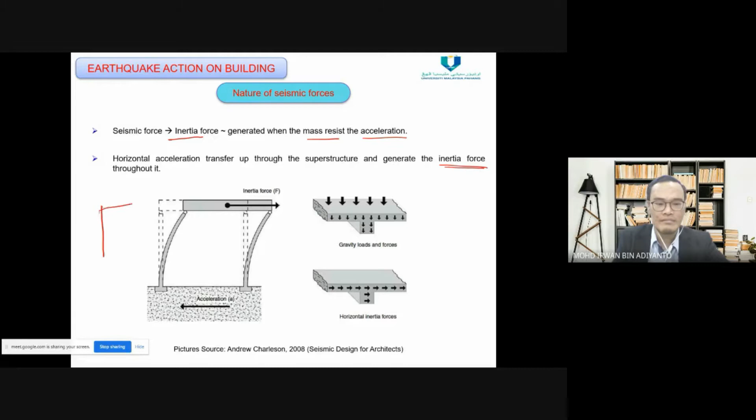Let's say this one: actually the building is static originally, and then when the earthquake strikes the site, it will cause ground movement. We can measure this in the form of accelerations, velocity, and displacement. It will accelerate the ground, and then this part of the building will remain static, which generates inertia.

This is the comparison between gravity forces and inertial forces: gravity load acts vertically, while inertial forces act horizontally.

For simplicity, to simplify your understanding, the inertial forces are assumed to act at the center of mass at each floor. This is the distributed inertial forces in the floor, columns, and walls.

The forces come from the masses of the building, which is from the dead load of the structural elements and also the imposed load—I mean the partial imposed load. We do not consider the whole imposed load; what we consider is about 24 to 30% only during the earthquake. It is distributed throughout the building from the masses, from the weight of the elements, and then we assume it becomes masses on the whole story.

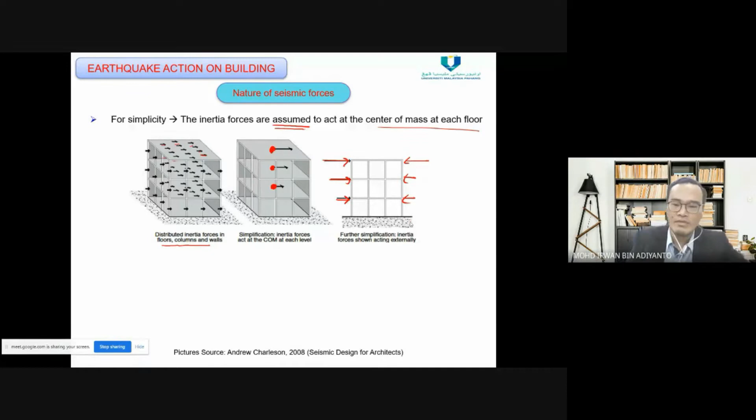Because, if you still remember our physics knowledge, force equals mass times acceleration (F = MA). This is the force, the mass is the weight of the building plus the imposed load, and the acceleration is from the time history record, where we record the accelerations against time during the earthquake.

So this is the comparison between wind action and earthquake action. Wind action is when the wind blows on the building, it acts as a pressure on the external cladding or external brick wall, and then we distribute the load to the joints. But earthquake load originates from the inertial forces and is strongly influenced by the amount of mass and the amount of acceleration.

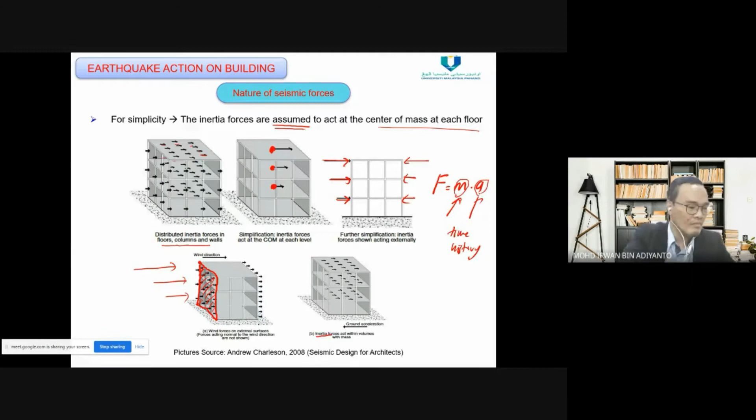Here are some factors affecting the severity of forces, which is the weight. As mentioned before, according to Newton's law, force is proportional to mass: F equals ma. So we try to be as lightweight as practicable. For example, we replace heavy masonry interior walls with lighter material in order to reduce the mass, and at the same time reduce the forces.

The natural period also affects the severity of forces, as well as the damping, response spectrum, and the level of ductility.

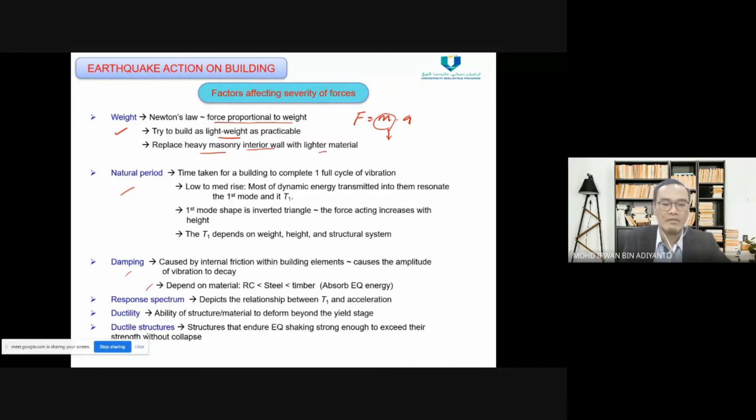Now we take a look at structural damage due to earthquake. This is typical damage due to earthquake on buildings. It can be divided into two: damage on the structural system and damage on the non-structural system. For RC buildings with moment resisting frame systems, damage is observed on the beam, column, and the beam-column joint. For the non-structural system, damage usually occurs on the brick wall and partitions, as well as the ceiling, where the ceiling will fall down.

This research from Bayraktar et al. mentions that structural damages occurring on RC buildings as a result of earthquake actions are mostly associated with the following reasons, among the main reasons of structural damage: soft story failure, weak column strong beam design, short column effects, and lack of transverse reinforcement in the beam and column.

Let's say this is the joint of the beam and column. Transverse reinforcement means your link. Let's say this is your vertical bar of the column, and this is your horizontal bar of the beam.

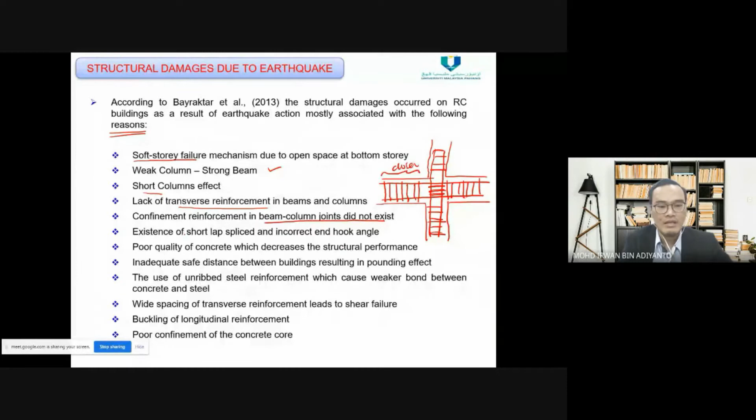And then there's the existence of short lap splices and incorrect end hook angles. Especially in links - imagine this is your link and this is the main bar. The end hook angle should be like this one, but sometimes in construction, to simplify, they just end up like this one. Let's say this is a column, so this one is weaker than this one.

Poor quality of concrete, inadequate safe distance between buildings which results in pounding effect, and also the use of unribbed steel reinforcement, which causes weaker bond between concrete and steel.

So for seismic design, we prefer the use of steel bar with ribs, not rounded bar. And then the wide spacing of transverse reinforcement led to shear failure, buckling of longitudinal reinforcement, and poor confinement to the concrete core. That's the main reasons for structural damage to RC buildings.

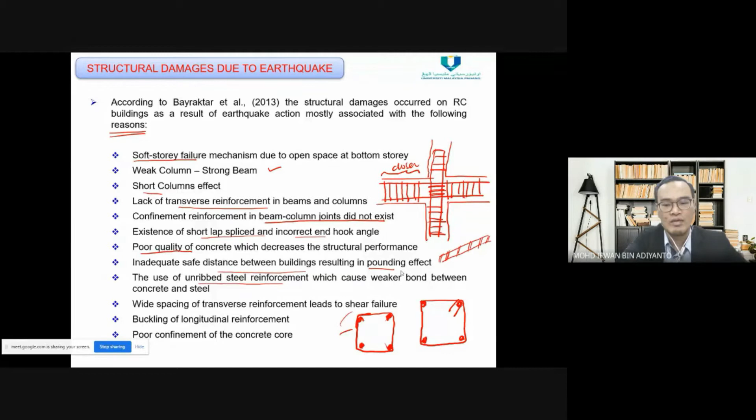Now we take a look at the performance level.

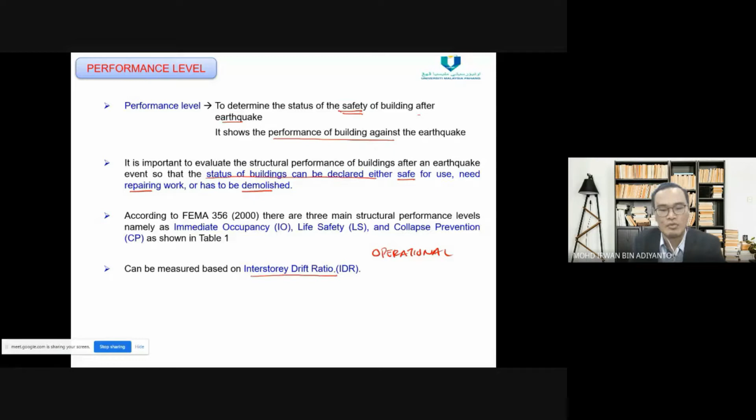And in terms of inter-story drift ratio...

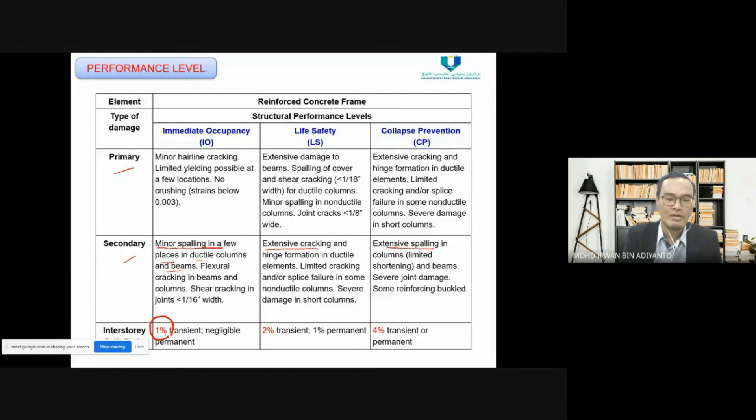Okay, can we continue? Sorry for the interruptions. Okay, for the immediate occupancy performance level, the inter-story drift ratio will achieve 1% of drift, and then 2% for life safety, and 4% of drift for collapse prevention.

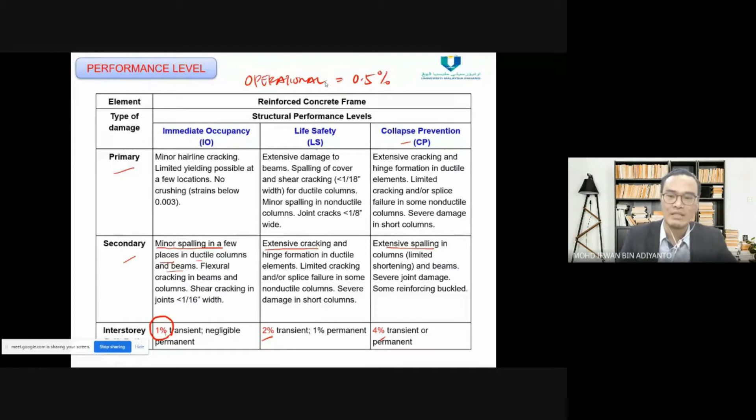For operational, okay, the drift is equal to 0.5%, where the building can operate immediately after the earthquake. We can use the building immediately without further checking, but it must achieve at least not more than 0.5% of drift.

Okay, here is the performance level. The inter-story drift ratio is the relative displacement of adjacent story normalized to its story height.

Let's say this is story number 1, story number 2, and story number 3. So the inter-story drift ratio for level number 1 is the displacement here, let's say this is point number 1, this is point number 0. The lateral displacement here minus the displacement at the bottom, divided by its corresponding story height, and multiplied by 100. So we will get the value of inter-story drift ratio.

Okay, this is an example of a 3-story RC model. I compare the performance between soil type B and another soil type, for level number 1, level number 2, level number 3. You can observe here that the maximum inter-story drift ratio occurred at the bottom part of the building, where it reached 0.75% for one soil type, and it performed better on soil type B, where the value is only 0.5%.

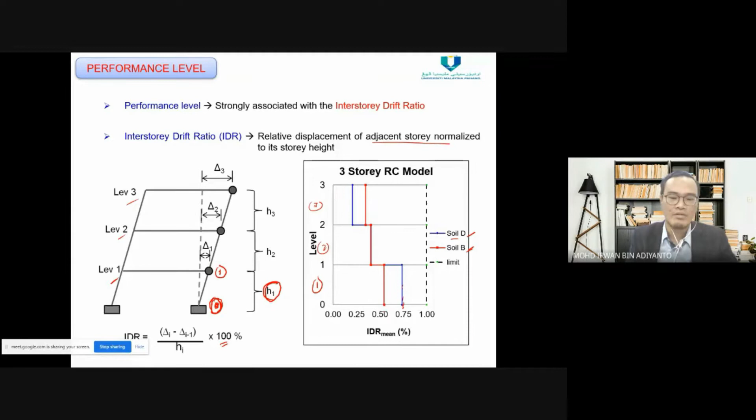Okay, let's do some exercise to avoid sleepiness. Let's say we have a 3-story building where the story height H1, H2, and H3 is 3.3 meters, and the lateral displacement is given here as 0.132, 0.208, and 0.314.

How to calculate? First of all, in my subject, I advise my students to do it in the form of a table like this one. We just write down the value of lateral displacement here, and then we measure the value of drift. Can a student help me fill in this form?

To fill in this form, what is the value here? Any students? 0.132, okay. We will start from the top first. 0.106, okay, how about this one, the second story? 0.076, okay, good. And then the last one, 0.132, okay good. So I hope you know how to calculate this value.

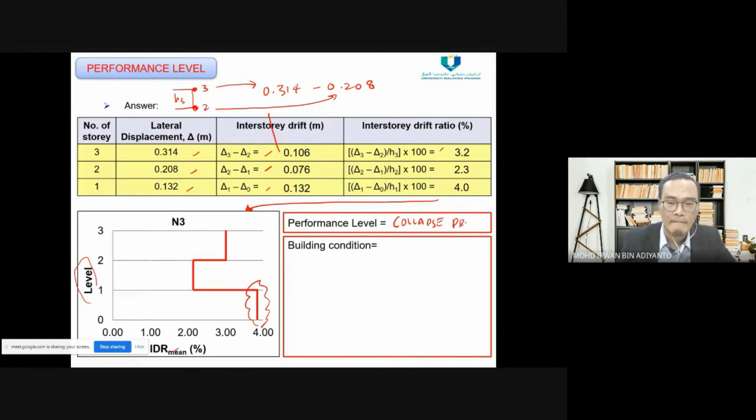Collapse prevention, or CP. Why do you choose collapse prevention? Because the highest IDR is equal to 4%. So at this level, what do you propose for this building?

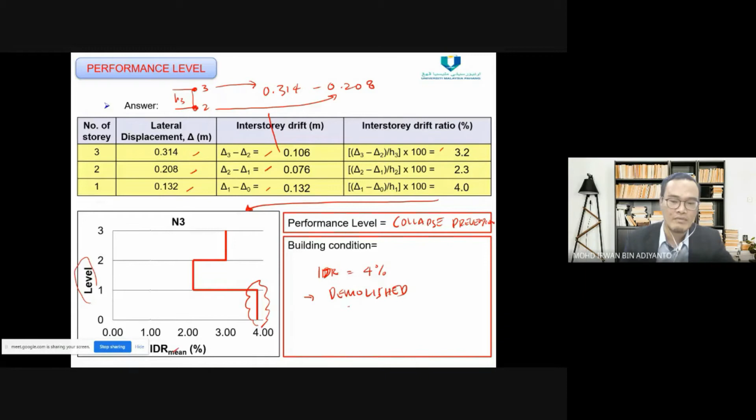Is it suitable to be used anymore? No. Okay, so you must propose for the building to be demolished because the repairing work will be very expensive, as the column almost loses its ability to cater for lateral load and even for gravity load. It's very difficult to repair, so it is recommended to demolish the building.

Okay, how about exercise number 2? I give you 5 minutes to settle. Do you have the answer? Anybody have an answer for this one?

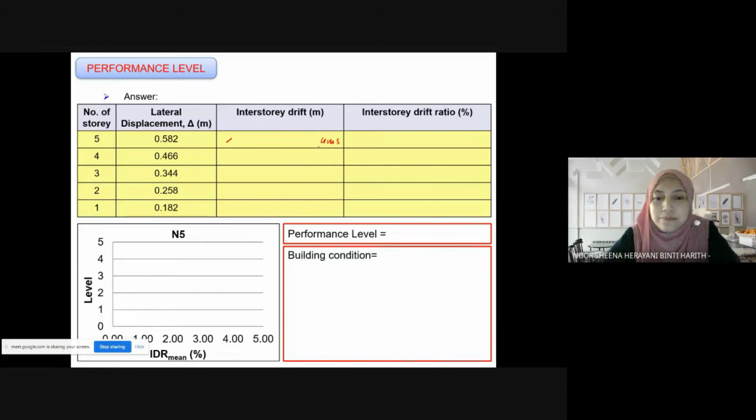Any volunteer from UMS to answer this one? Hello, my name is Anand, I'm from UMS. Okay, congratulations, what's the answer? My answer is 0.116. 0.116, okay, exactly, this one 0.116, okay, congratulations.

So how about Unimap, any volunteer? Iqmal, sila. Assalamualaikum, salam, okay, siapa nama? My name is Iqmal, I'm Iqmal Hakim. Okay, what's your answer? Answer is 0.122. Okay, congratulations.

Anybody from UMP? My answer is 0.086. Okay, congratulations. Anybody from ITB?

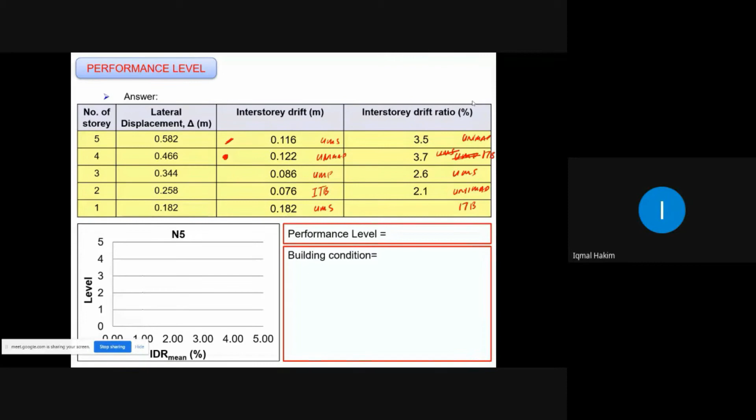Okay, Unimap. 2.1, sir. 2.1, okay, what's your name? Iqmal. Iqmal, okay good. Okay, and last one from ITB.

Okay, your answer please. Who's the first to answer this one, Andy or... okay, any answer here from ITB? Hello sir, okay hello, Andy again. Yeah, okay good, 4.55, 4.5.

Okay, 4.3 I got. Is it okay? Does everyone get 4.5? Oh sorry. 4.5 or I think 4.3? The height of the first story, 4 meters, is right? Sorry, first story is 4 meters.

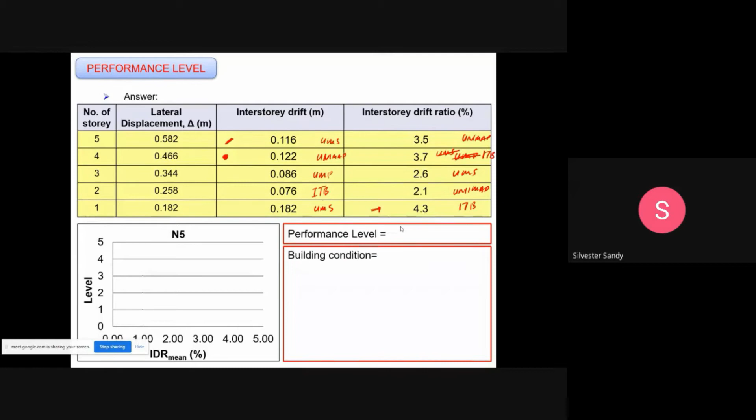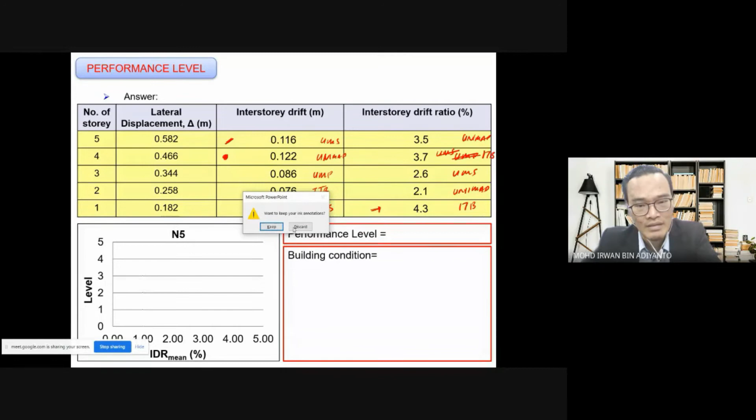Sorry, per type? The height of the first story is 4 meters. No, sorry, it's 4.2 meters. 4.2 meters, okay, I missed that. Okay, so thank you, it's 4.2 meters, it must be lesser. Okay, let's look here, 4.2 meters, okay, that's good.

Okay, so how about the interstory drift ratio? So the graph will be this one, okay, you just follow the value given by the table. And then, may I know what is the performance level here? Anybody?

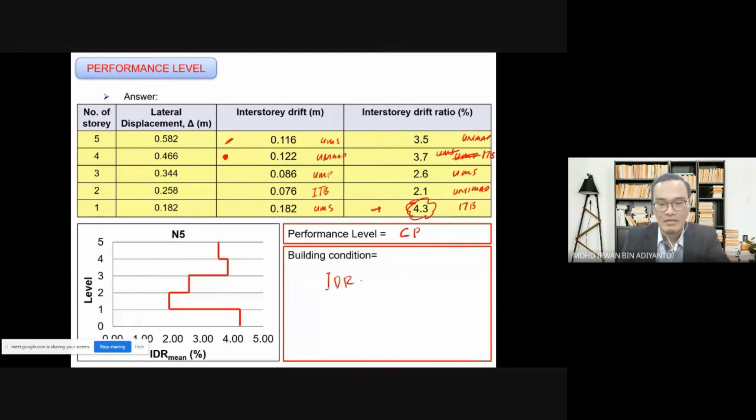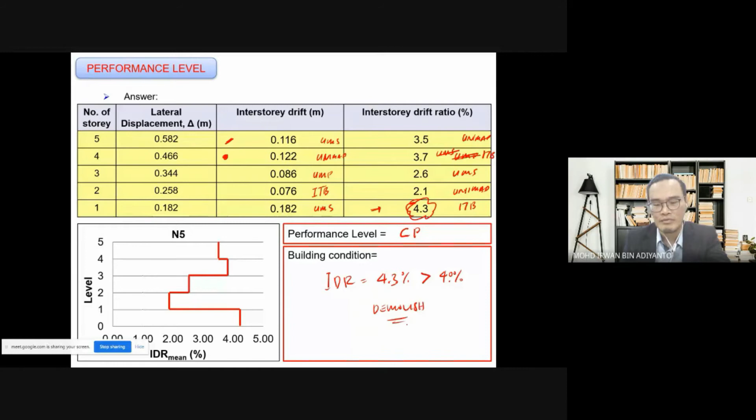Okay, what is the maximum? Maximum is 4.3, it exceeds 4%. So the performance level shall be collapse prevention, because the IDR is equal to 4.3%, greater than the 4% limit set by the code. So also like the 3-story building, it is proposed to demolish. Okay, thank you for your participation.

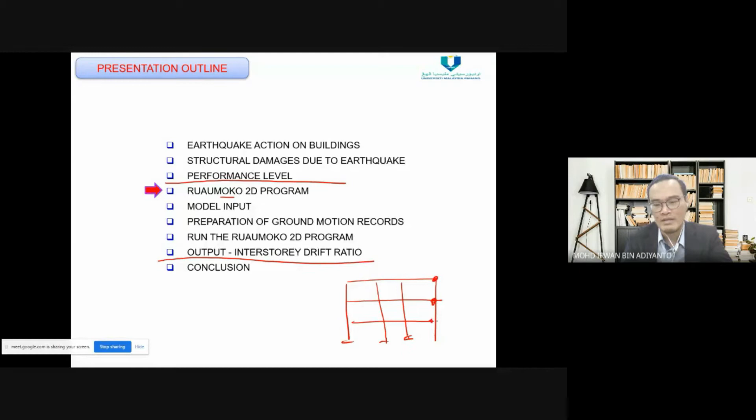Okay, and from this part to this part, I will talk about how to get the story displacement using the RUAUMOKO 2D program and a simple 3-story building. In our exercise just now, I already gave you the value of displacement at the bottom, at point number 1, point number 2, and point number 3. But in a real world situation, here's how to get the value of lateral displacement in this story.

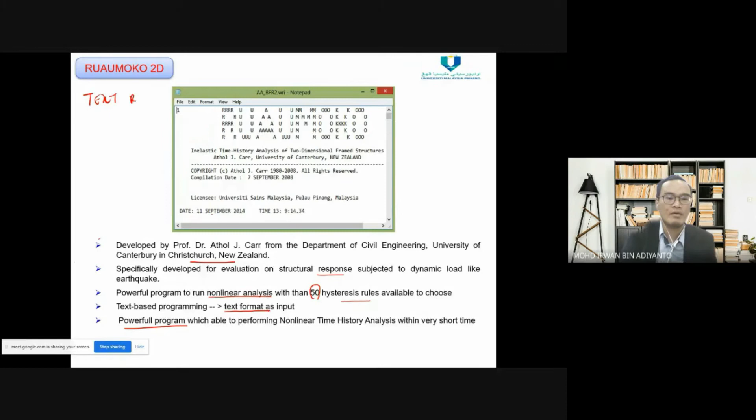It is a text-based program where we use text format as input. However, it's quite boring to use because it's not graphical based. But it is powerful to run the nonlinear time history analysis within a very short time. If you use a graphical based software, it may take hours, but by using the text-based program, it will settle your simulation within a few minutes only.

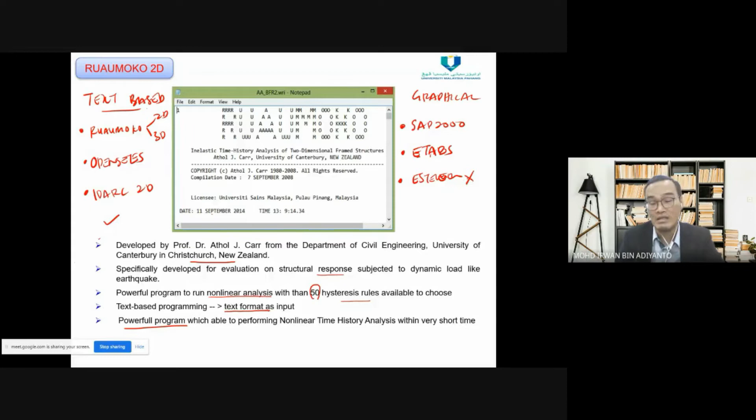Another one is graphical based, where you can see the graphic view of your model. Let's say this is SAP2000. You also have ETABS, and also you have, let's say, ESTEEM, but ESTEEM is just for design. You cannot do the linear nonlinear time analysis with ESTEEM.

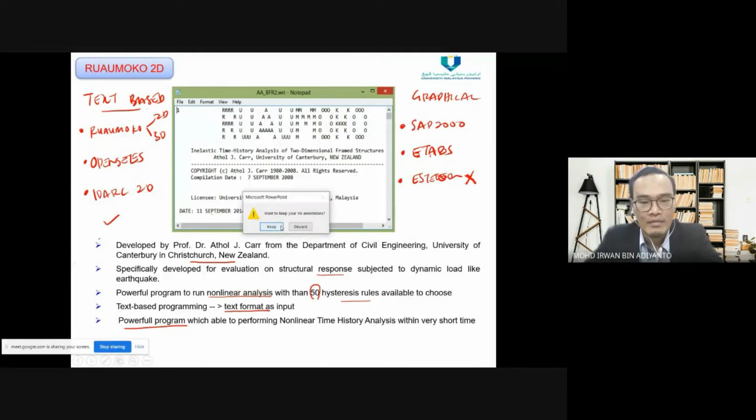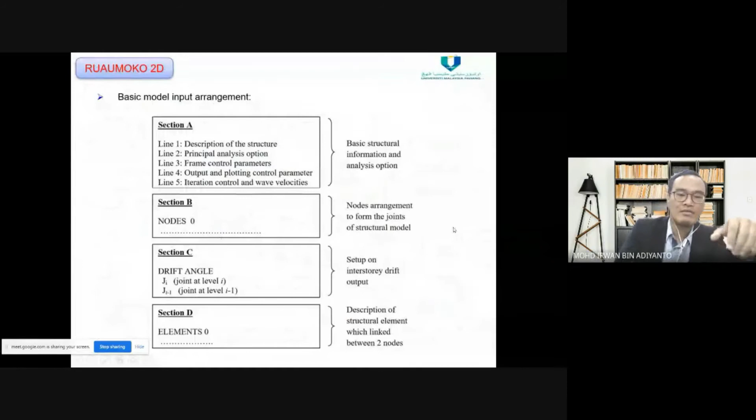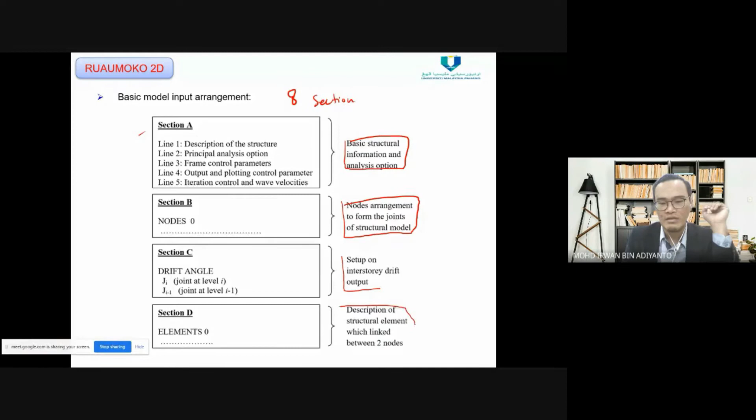In RUAUMOKO 2D, as input, we have 8 main sections for input models. Section A is for basic structural information and analysis options. Section B is the nodes arrangement to form the joints of structural models. This is the setup on inter-story drift output in section C. Section D is the description of structural elements which link between two nodes. Section E is the nonlinear properties of structural elements - this is very important. Section F is weight, section G is loads, and section H is the earthquake, which is the declaration of paths of ground motion records to be used in the nonlinear time history analysis.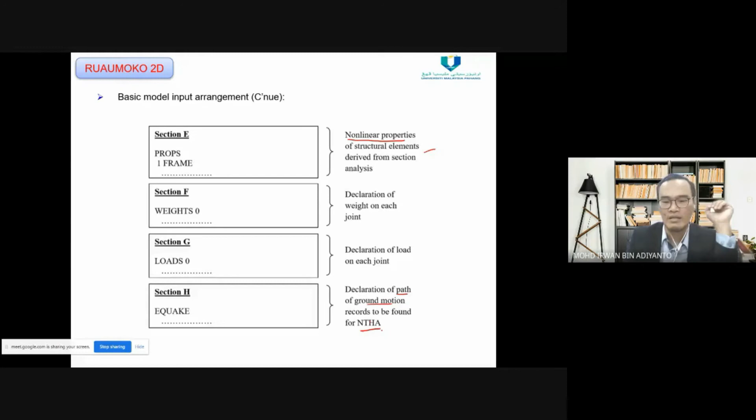To simplify, the Ruaumoko 2D program requires the input model, which is the detail of structure, type of analysis, up to weight and load. Everything is in text format, and we must also provide the earthquake data, which is the earthquake record of accelerations versus time. Then we run the analysis.

The Ruaumoko 2D will present to us the results in the form of joint displacement, and it will calculate the value of inter-story drift ratio, so we don't have to calculate it again. It will present the value of inter-story drift ratio directly.

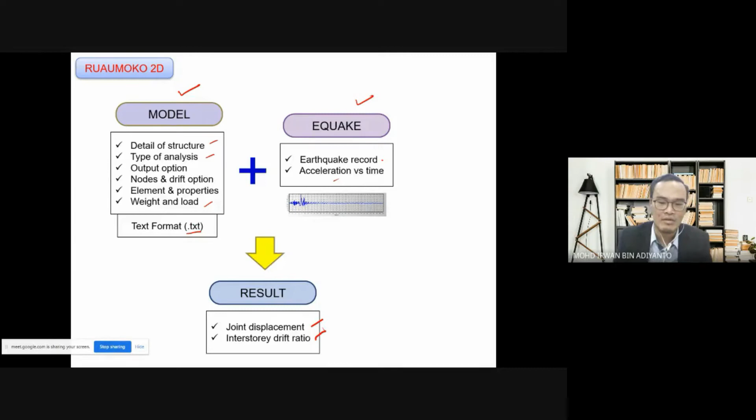Let's take a look at the model input. Let's say I have a 3-story 2D frame. We have two types of beams - beam B2 is at the roof, while beam B1 is located at the first and second floor. We also have two types of columns - C1 located at the exterior part of the building, and C2 located at the interior part. This is the detail for C1 and C2, showing the difference between these two columns.

The fundamental period of vibration is estimated as 0.5 seconds using modal analysis. This is the detail for B1 and B2. The detail is very important - let's say this is for B1, so it's located here. Every section here, near the column joint, is in the plastic hinge region - we call it the plastic hinge region.

In the software, we must declare what are the properties here - the stiffness, the strength, and so on. This section is located here for B2, near the beam column joint. As well as for the column, it's located here for C2. Since this is a 3-story building, it's similar, but if you have a higher story, maybe you have a different amount of reinforcement.

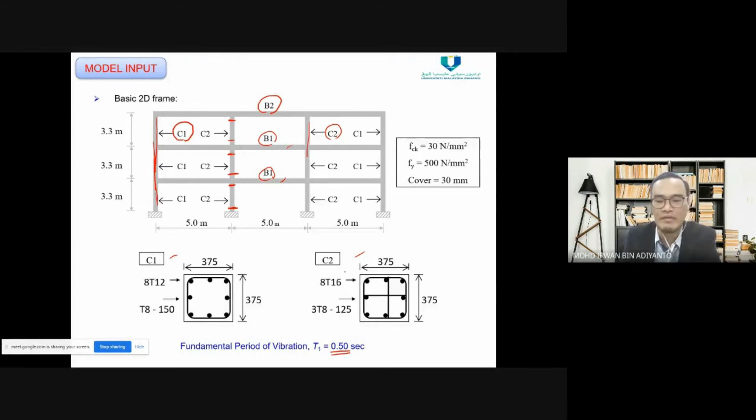For this 3-story building, we must number the nodes, the elements, and the section properties. Let's say this is the nodes - we have a number of nodes, marked as circles. The numbering covered by the circle here is the number of nodes.

Okay, all the circles here, number 1, 2, 3, 4, up to 16. So we have 16 which will join the beam and column, and the number in square here is the number of elements. Okay, we have number of elements is 1, 2, 3, 4.

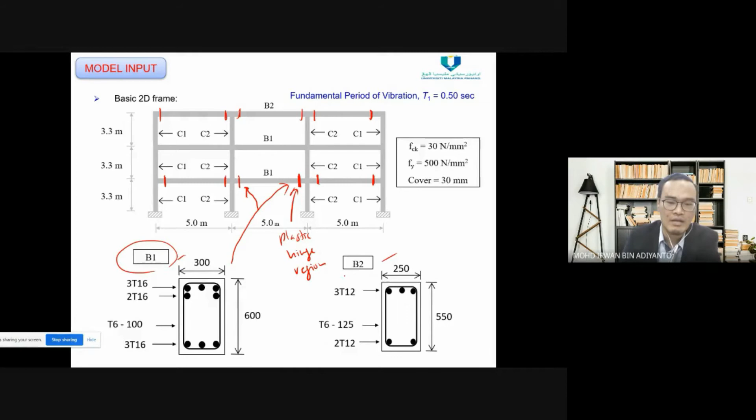We have 21 elements here of beam and columns, and this is the number of section properties. Okay, section properties is depend on the design of your B1 and B2, and also your C1 and C2.

So let's say this beam here has similar properties with here and here. Let's say this is the number of sections. The beam here have similar properties as here and here. This one also here and here, because of the numbering and the properties here, maybe we use a lesser reinforcement.

And this is the column for column number 1, and then column number 2 up to, okay, we have only 2 properties for column and 6 properties for beam. Okay, and this is the basic.

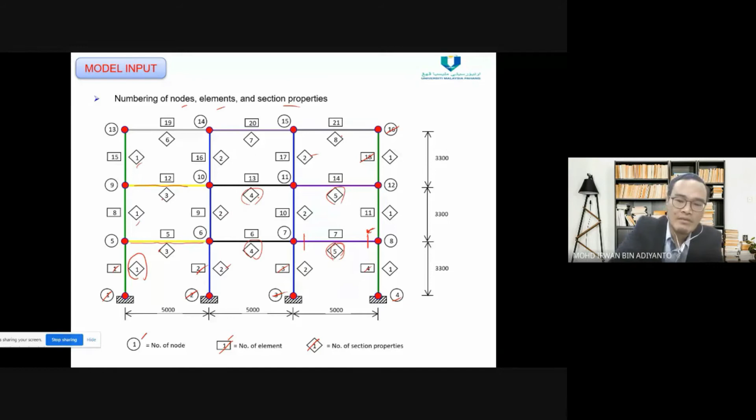Section A, you must fill in all 5 lines, which is the description of the structure, and then the principal analysis options, the frame control parameters, up to the iteration control and wave velocities.

Okay, I'm not going to teach you one by one about how to use Ruaumoko. Today's class is just an introduction on the structural analysis considering repeated earthquake. If you want to know more about this, maybe we can have another session, maybe around 2 or 3 days.

Okay, you can refer to the Ruaumoko manual. The manual will give you this one by one. Okay, from line number 2, we have A until I column, and then the A is IPANAL is number 2.

Okay, so let's say this one, from the Ruaumoko manual, it will give you why you choose a number. Let's say IPANAL is 0, if you put 0, this is the static analysis. If you put number 1, this is static analysis, static and modal analysis. So you must choose your option here.

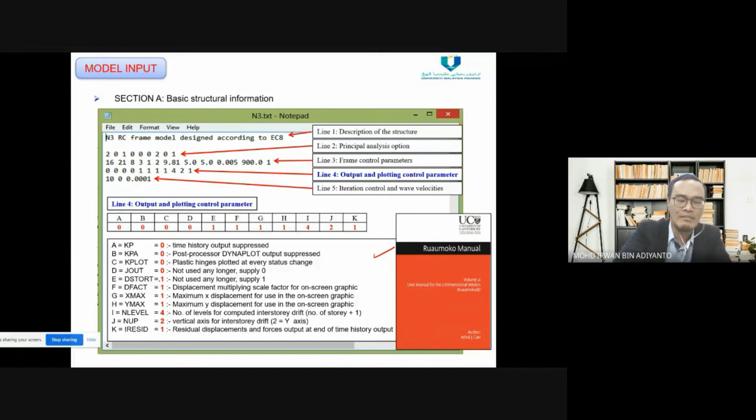Also this one, section B is your node arrangement to form the joints of the model. From this one, you convert to the text. Let's say joint number 1 is done. Okay, this is, can you imagine the Cartesian, X, Y, and Z.

Okay, the X is 0, this is 0, 0. So this is your 0, and this is also 0. Okay, this is your support. Number 1 is for fixed and 0 is for free. So you can see that joint number 1 up to 2, 3, and 4, all 4 joints is number 1 because this is a fixed support.

Okay, this means that joint number 5 is the master joint, which is the master joint. Means joint number 6 will follow the property, will follow this displacement of joint number 5. Means joint number 5 is the master, and number 6, 7, and number 8 here, we call it slave.

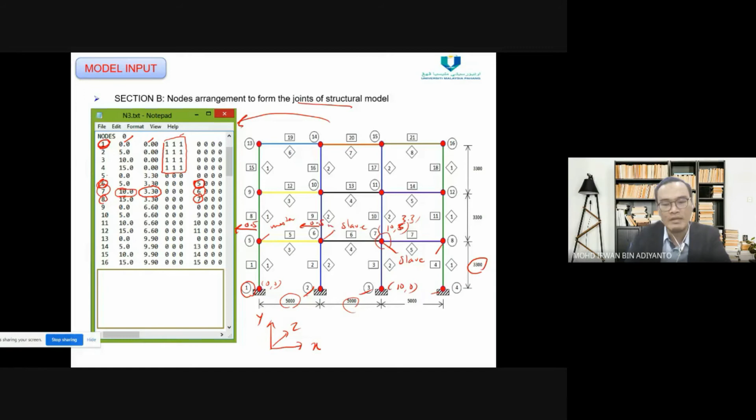Okay, you see here, up to number 8, 8 will follow number 7, 7 will follow number 6. So if, let's say, joint number 5 displaces around 0.5 meter to the left, so joint number 6, 7, and 8 also will displace around 0.5 meter to the left. Okay, that's what we mean by master and slave.

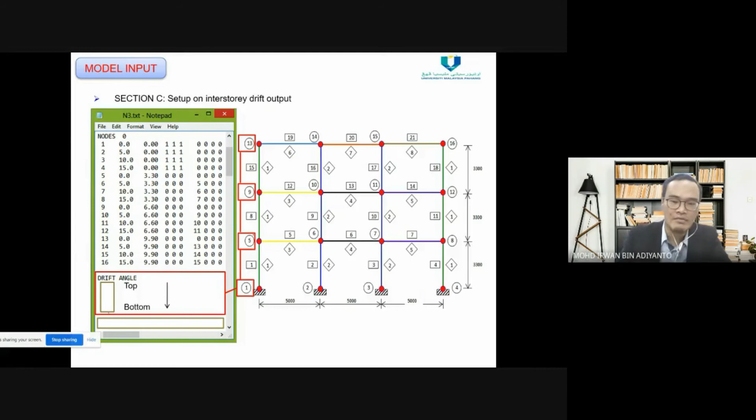And also, then we must set up the inter-story drift output. Okay, at section number C, we must declare what is the drift output. It starts from joint number 13, 9, 5, and 1, and then drift angle 13, 9, 5, and 1.

Then the program will calculate for you, so you don't have to recalculate.

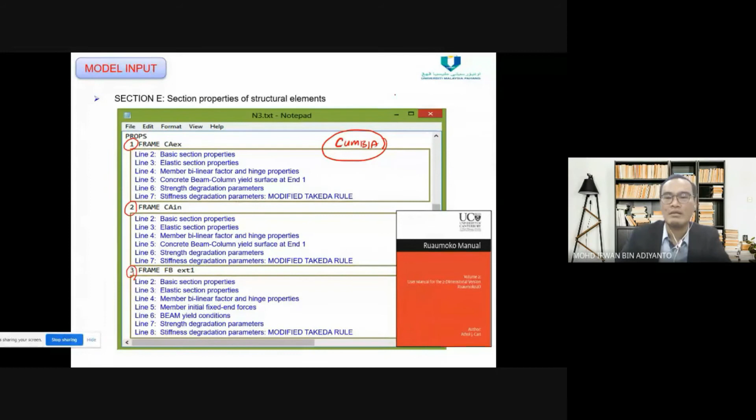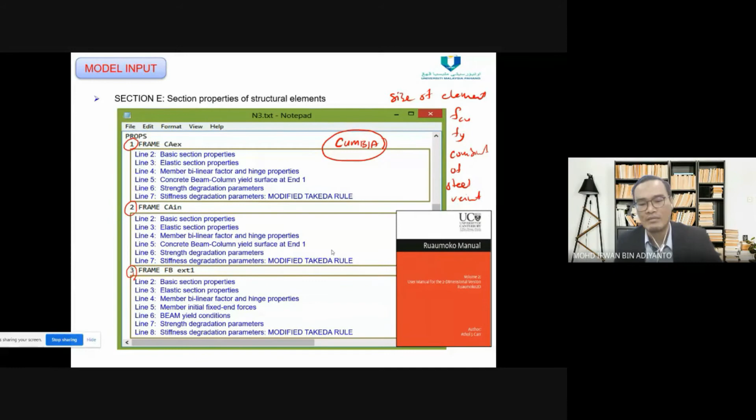Section E covers the structural elements mentioned before—this is the properties of element 1, element 2, element 3. You must conduct section properties analysis. I did this once from 2011 to 2014 using the Cumbia program, where we input the size of structural elements, the value of concrete strength, steel strength, and the combination of steel reinforcement. We must input this with that software, but I'm sorry I cannot demo it because I don't have Matlab on this laptop. We use Matlab to operate Cumbia.

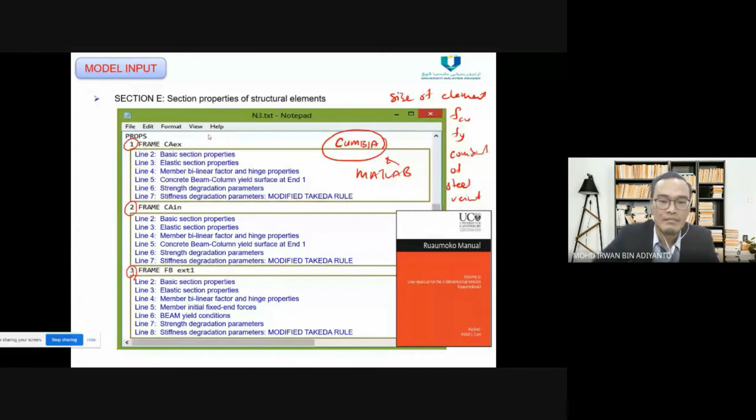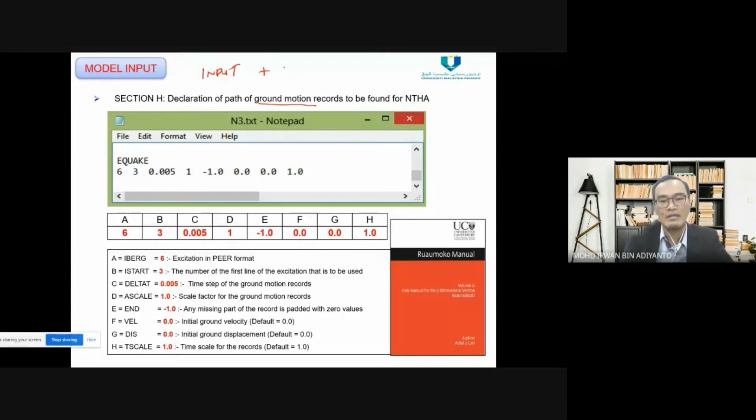So this is section F, section G for loads, and this is the path of ground motion. As mentioned before, we must provide the input of the building model, and we must also provide the ground motion.

Then this is about the preparation of ground motion records.

Any new participants to join? Because I heard the ping. Okay, oops. Okay, sorry.

This is how to prepare the ground motion record. For the nonlinear time history analysis, I use 7 ground motion records from each far and near field earthquake, with magnitude ranging from 6.2 to 7.6. According to the Shome method, all ground motions are scaled by referring to the spectral acceleration with a damping ratio of 5% at the fundamental period of the generic models.

I use single and repeated earthquakes. Case 1 is a single earthquake, which only considers the main shock. Case 2 is a repeated earthquake, which considers the existence of foreshocks, main shock, and aftershocks. For the aftershocks, we scale down by multiplying by 0.8526, because the foreshock and aftershock usually have lower magnitude than the main shock.

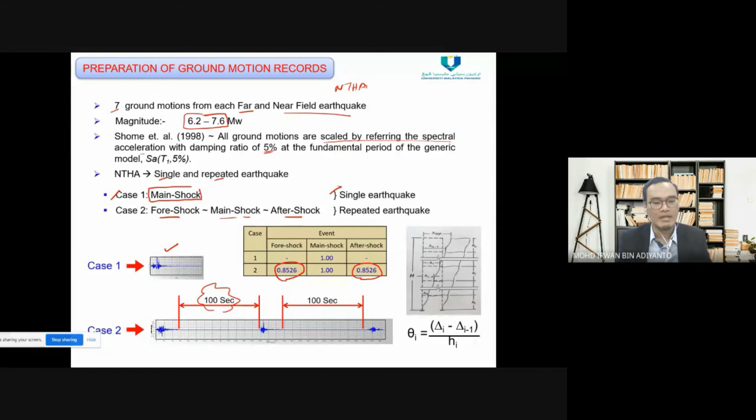So this is the ground motion records for single earthquake, and this is for repeated earthquake. A 100 second time gap is provided between all these records in order to give time for the structure to cease vibration.

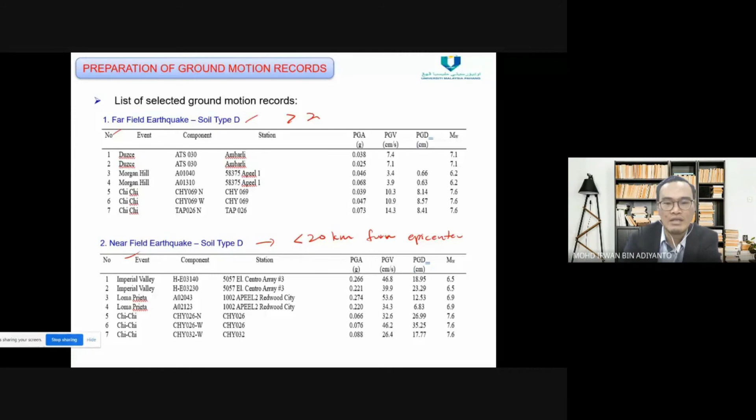This is an example of the ground motion record I selected for this study. I consider soil type D, far field and near field. Near field earthquake is any ground motion recorded less than 20 kilometers from the epicenter, considered as near field. Any ground motion recorded larger than 20 kilometers from the epicenter is considered as far field earthquake.

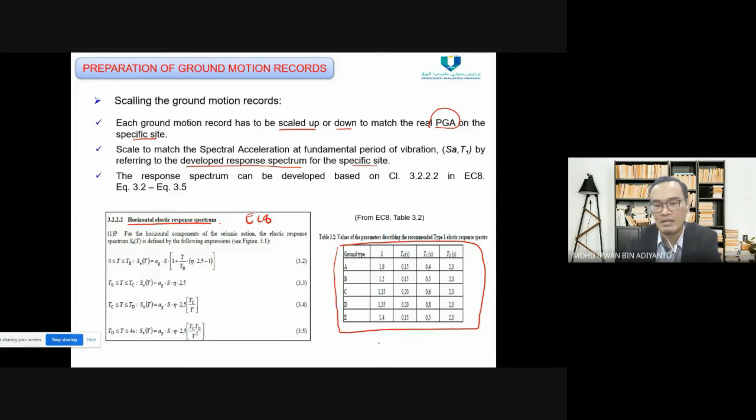Let's say this one, from the National Annex. My study is located here—I want to study the site specific location here. So the value of reference peak ground acceleration is equal to 0.12 G, and since I consider soil type D, I use this parameter.

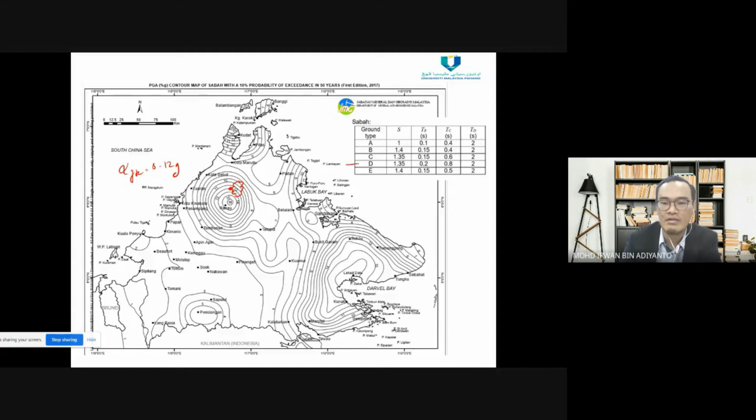So this is the elastic response spectrum developed. Since the fundamental period of our building is equal to 0.5 second, we project here, and we know that the value of spectral acceleration shall be 0.567.

So we must know what is the value of spectral acceleration from the original time history record—what is the value here? Once we know this value, we can determine the scale factor to be used, so that the spectral acceleration for the time series record will match the value of the specific site spectra.

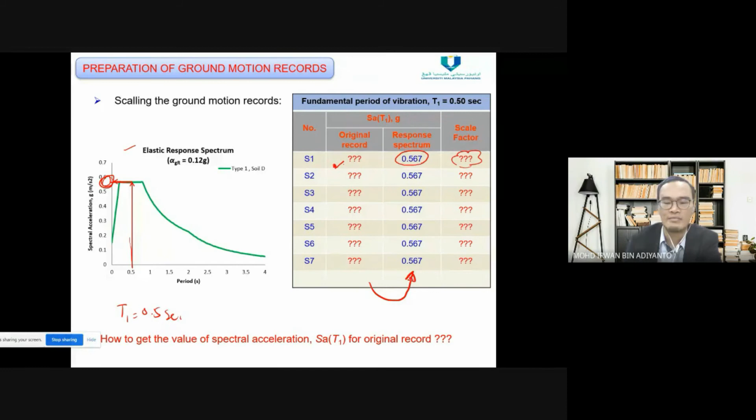First we open—let's say this is the example of time history record, from the Duzce earthquake in Turkey, if I'm not mistaken. The time step is 0.005, and these columns, 1, 2, 3, 4, 5, represent the value of accelerations in units of G.

So on the desktop, in the folder, the file far field original—this is the original ground motion records. We open it by using the SeismoSignal program.

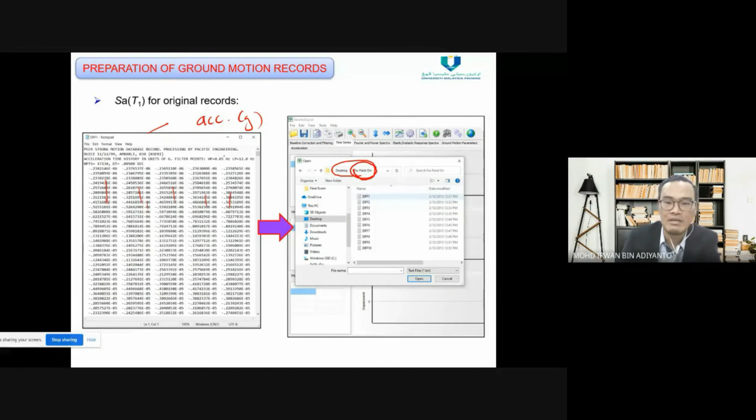Okay, the program will give this graph to us. This is acceleration, this one is velocity, and this is the displacement. And then we just click here.

Okay, elastic or inelastic response spectra. It will convert the time history record, convert to the response spectra.

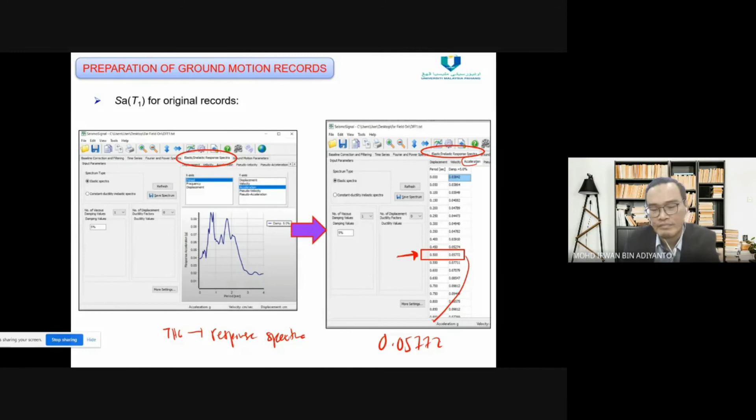For that ground motion, we can select the value of acceleration at 0.5 seconds, which is similar to our building period. The value here is 0.05772.

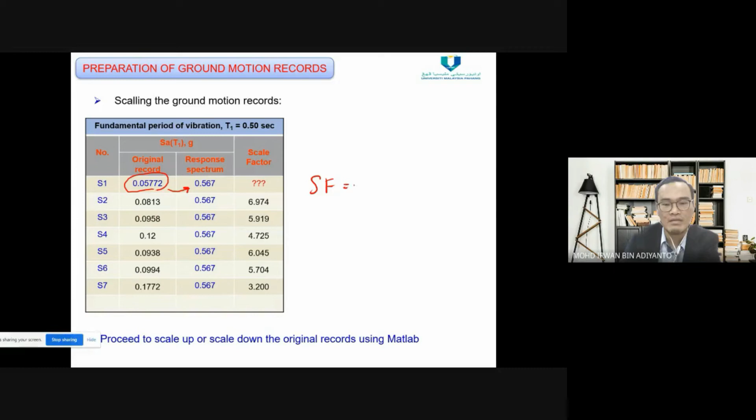0.05772, so that's the value of the original record. We want to make it match this one, so we have to scale up or scale down. The scale factor is equal to the response spectrum at the specific site, divided by the response spectrum value of the original motion.

So what is the value? 0.567 divided by 0.05772 - can somebody help me? Ratio calculator. Anybody? 9.832, sorry, 9.82. Okay, so the scale factor here is 9.82.

This means that, let's say this is the original motion, but to be used for this model, we must amplify it. By using the scale factor, we will enlarge it around 9 times, so the value will be 9 times higher, in order for it to match the value of the response spectrum here.

So for this, I also used MATLAB before. We built our own program, actually built by Dr. Adi Faisal from UMSU - thank you very much for his effort.

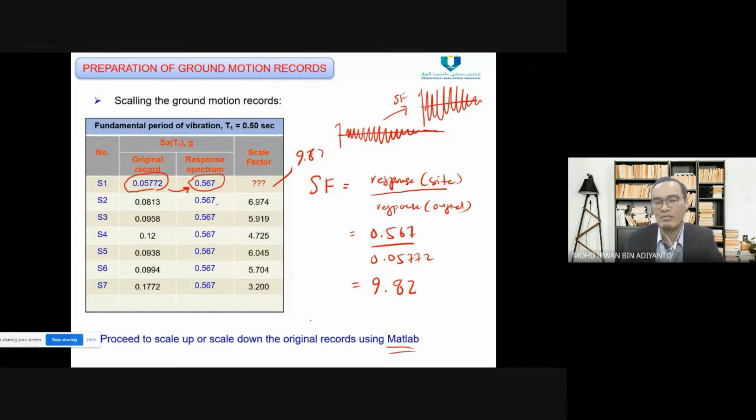We must scale one by one, referring to this scale factor, and then we must put down the value of the scale factor, and then save the newly generated ground motion as the single earthquake, case 1.

For the repeated earthquake, we refer to the work of Professor Hatzigeorgiou from Greece. For the main shock, let's say this is single, R stands for repeated, S for single. So the single earthquake is S1 to S7, and we just arrange the main shock as 1, 2, 3, 4, 5, 6, and 7.

And then for the foreshock and aftershock, we just randomize them - let's say S5, S7, S3, S4, S7, S3, that's also okay, we just randomize. We generate a random combination using an Excel program, also available.

Let's say 3, 7, S4, S7, S1, S2 - so we will combine all this into one ground motion record. We will combine it later. So this is how to generate the repeated earthquake.

First, we prepare the single ground motion record, which is already scaled, either up or down. We prepare it in one folder, and then we also must prepare the zero ground acceleration records in another folder.

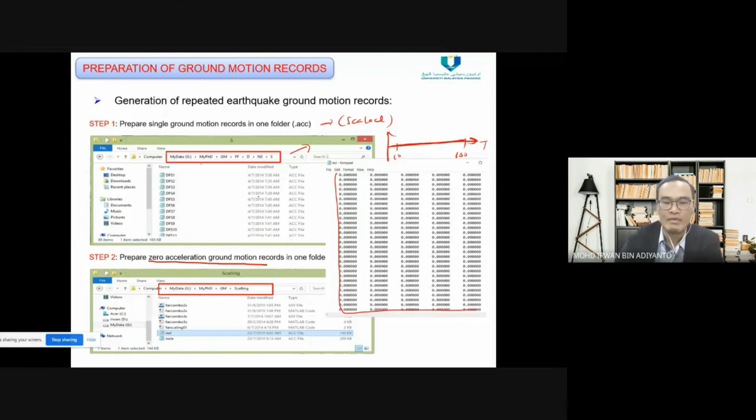This record is for 100 seconds - the time T is from 10 up to 100 seconds, and the value of acceleration is 0. You can see here the value is all 0, because we want to provide this gap - it's 0, so the record is here.

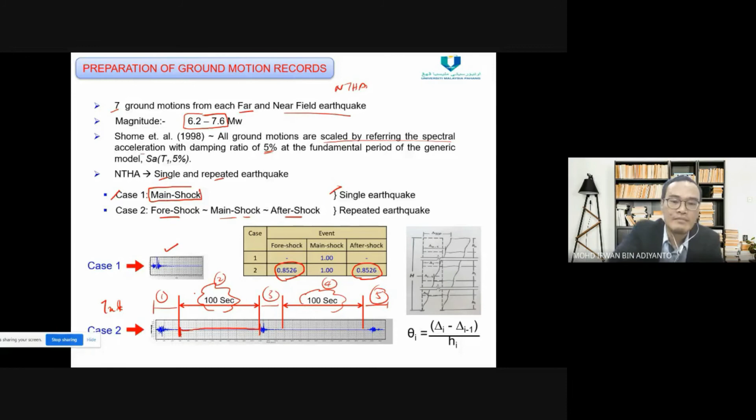The ground motion record is also in text format. So let's say this is number 1, this is number 2, number 3, number 4, and number 5. We want to combine all 5 text files into one.

And then we prepare an empty folder - step number 3, prepare an empty folder for the output of the repeated earthquake record. Let's say this is the generated motion number 2, 1, and 7 for repeated case 1, motion number 1 of case 2.

And then we open this example MATLAB file developed by Dr. Adi Faisal in 2010. We must open the scale file - this is for the foreshock, this is S number 2, meaning single number 2.

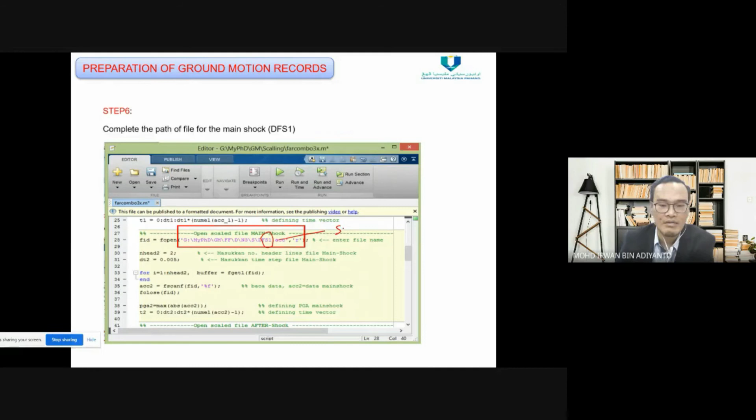And then the main shock is scale number 1, single number 1, and the aftershock is number 7. We just edit this path, so the MATLAB program will find our file.

And then this null means zero acceleration, and this is the folder - the path where the product will be sent by the MATLAB program, and then we can write down anything here as our reference.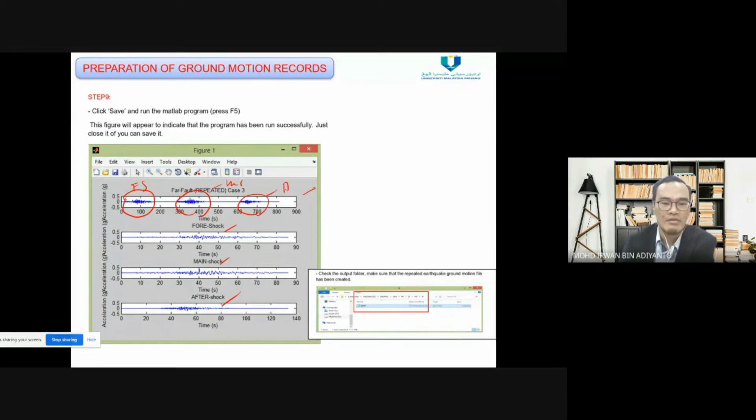Okay, now how to run the Ruaumoko 2D program. We already prepared the input from our building, and we already prepared our ground motion records. Now let's see how to run the program.

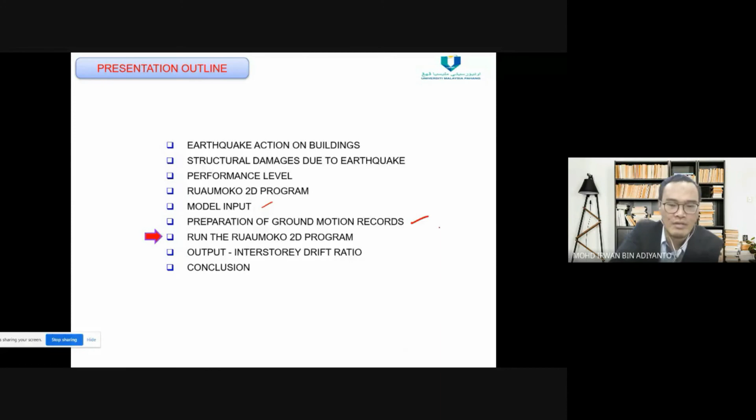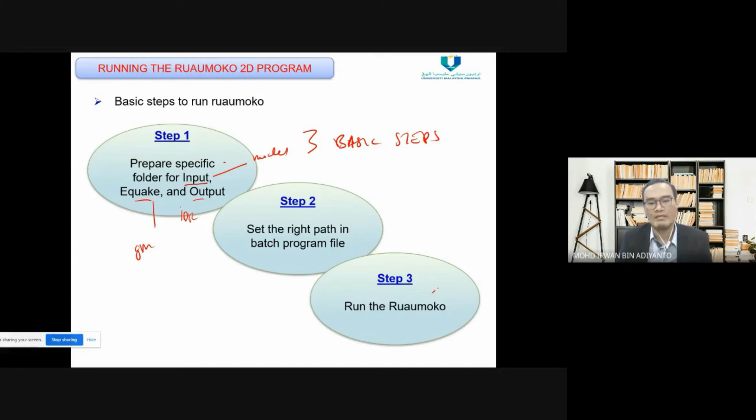We have 3 basic steps to run the program. First, we must prepare the specific folder for the input, the earthquake, and the output. Input means the model of the building. Earthquake means your ground motion records. Output will be your results in terms of inter-story drift ratio and so on. Then step number 2 is we set the right path in the batch program file, and then we can run our Ruaumoko program.

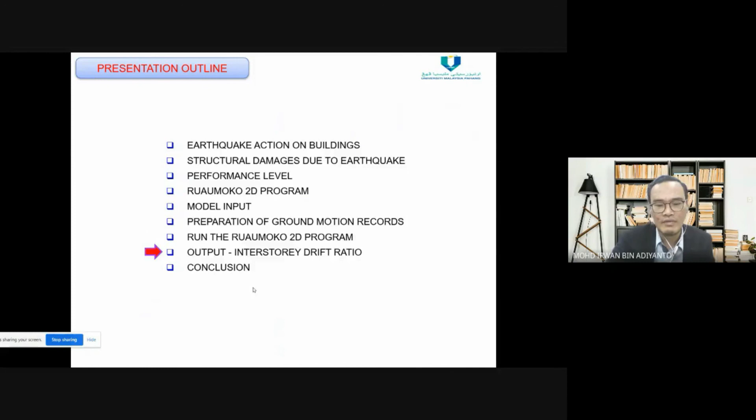And this one is the output in terms of inter-story drift ratio. As I mentioned before, we must provide the folder for the output, and then the program will send the output here, also in a text file, so we can extract the value of inter-story drift ratio.

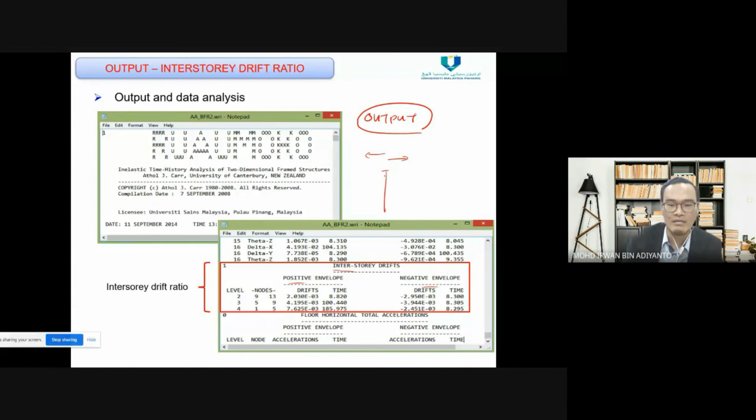You can see here the positive and negative envelope, because our building moves to the left and to the right, so that's why we have positive and negative envelope.

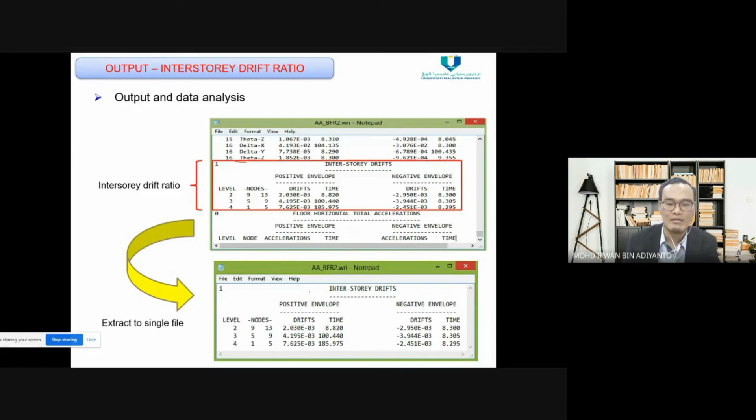And then this is the data. We detect this data from the output, and then we can extract it to a single file using another program, and then we can open this file in Excel, and then we can take the value of the inter-story drift ratio.

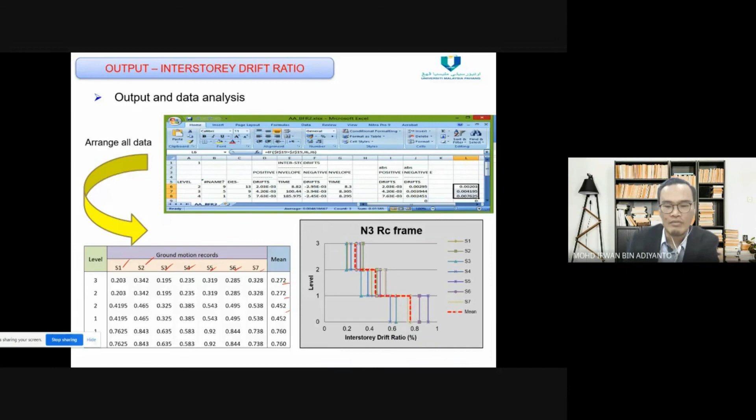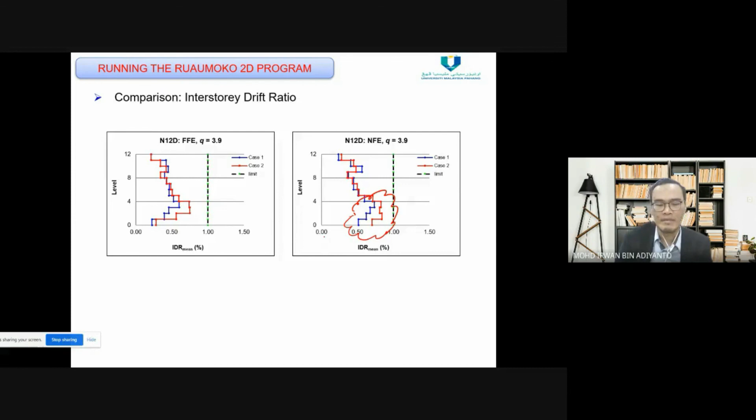Now let's do some conclusions. Anybody want to do conclusions? Any conclusions? I can see at least 2 conclusions here. Anybody want to conclude? You just conclude based on the value of inter-story drift ratio.

Because our topic here is seismic performance, you can conclude based on the result of inter-story drift ratio. Anybody, based on this result? What can you see between the near field and far field, and between the repeated and single earthquake?

This one, right? Okay, repeated will cause larger inter-story drift ratio than the single. So you can use the conclusion: inter-story drift ratio caused by repeated is always larger than single.

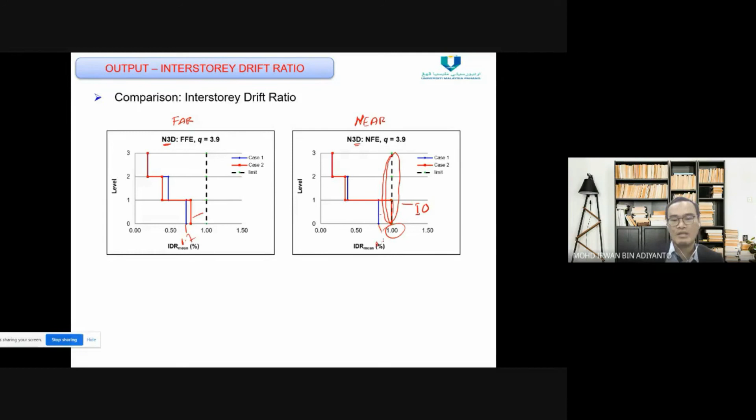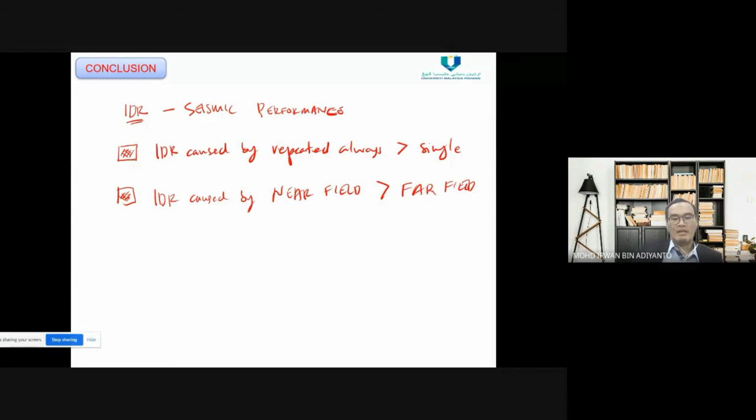What can you conclude is that the IDR caused by the near field earthquake is always greater than what is caused by the far field earthquake. Any other suggestions you want to conclude?

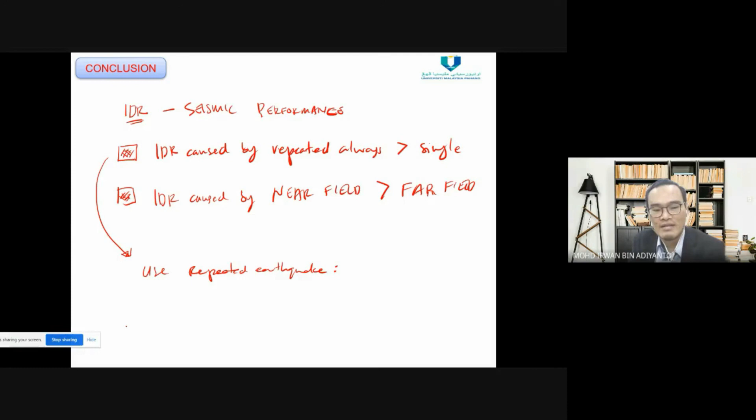Related to conclusion number one, it is strongly suggested, in order to evaluate structural performance, to use the repeated earthquake, to consider the repeated earthquake phenomena, because it will give you a larger amount of drift. So you will never underestimate, you will never miss these situations, because in the real earthquake, the earthquake did not occur just a single time.

Just like what has been presented by Dr. Shina last 2 weeks, earthquakes will always occur repeatedly. Let's say this one occurs, and then after 2 or 3 days, or after 2 or 3 weeks, another one will occur. This is the main shock, and then aftershocks will occur again and again. So the action of repeated earthquake will cause higher inter-story drift ratio, and could produce more damage to buildings.

We must consider this. Because current practice only considers the single earthquake, and if we find that the building passes, we say the design is okay. However, current situation suggests we consider the existence of repeated earthquake.

So the meaning is we should not under-design. We are not under design, so we consider this.

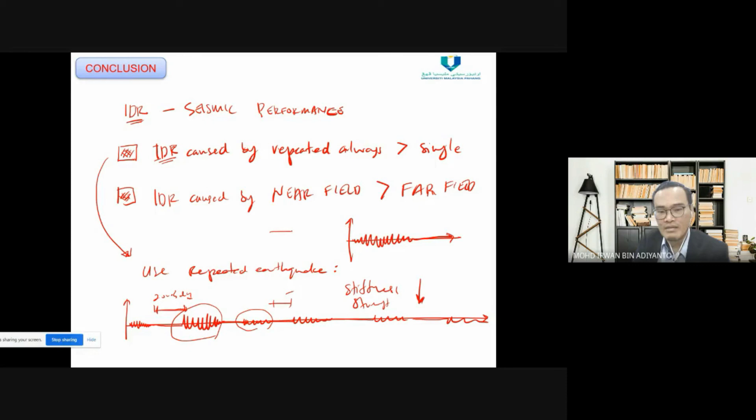This phenomena, maybe after a few days or a few hours, it will occur again. Because after the first strike, the stiffness and the strength of the building might be degraded, so it will be easier for these smaller ground motions to cause more lateral displacement to the building.

Any questions? Thank you so much. That's all my presentation today.

Never give up, dare to dream and dare to believe. Okay, thank you so much.